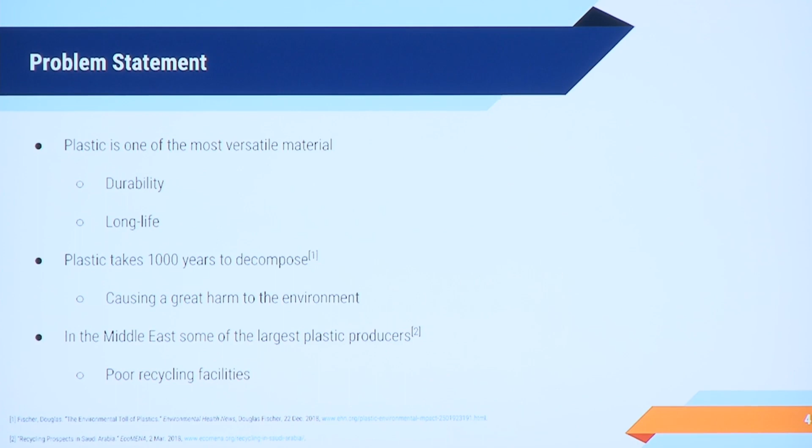Plastic has been used all over the world due to its attractive features such as its high durability and long life. But these features come at a cost, because plastic takes almost thousands of years to decompose, which causes great harm to the environment in general.

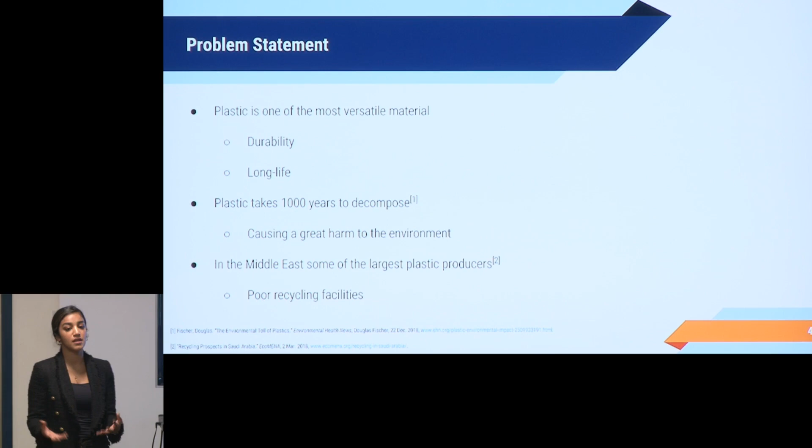In the Middle East, more specifically, are some of the largest plastic producers in the world. However, the recycling facilities and sustainable plastic there are very poor. Even though recycling facilities are poor, there's very high usage and waste generated in that region. The waste generated is estimated to be equal to 2 million cars in weight, and the usage of plastic is 20 times the world average.

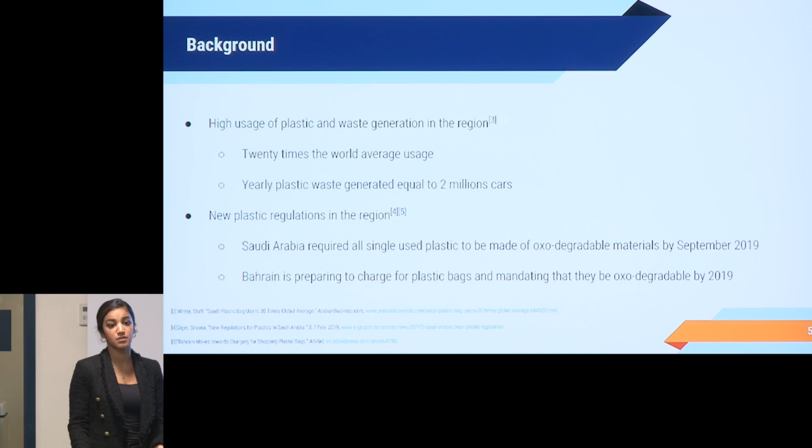To counter these problems, some new plastic regulations have been put in place in that region. Saudi Arabia has made it mandatory that all plastic be oxo-degradable by the end of September 2019. Another country in the region, Bahrain, is preparing to charge for plastic bags and make all plastics oxo-degradable by the end of 2019.

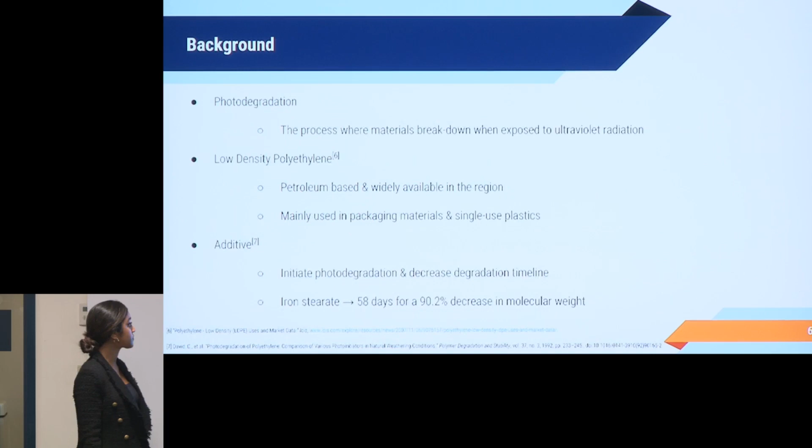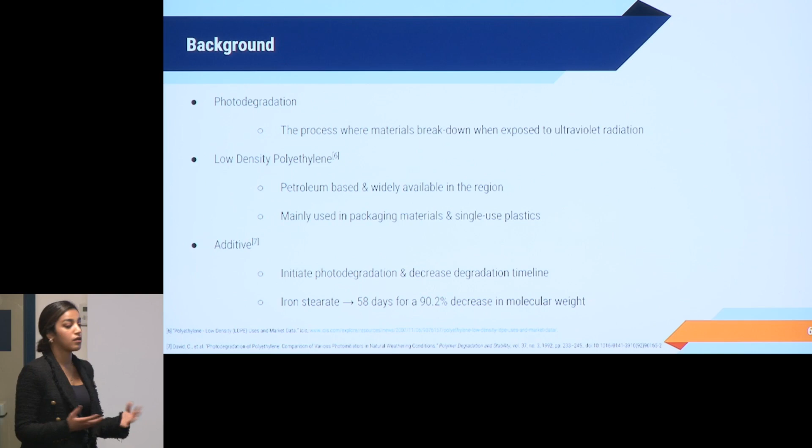So what's photodegradation? Photodegradation is the process where the material, when exposed to sun rays for a long period of time, degrades. We're focusing more on the polymer low-density polyethylene, which is widely available in the region given that it's petroleum-based, and also mainly used in single-use plastics.

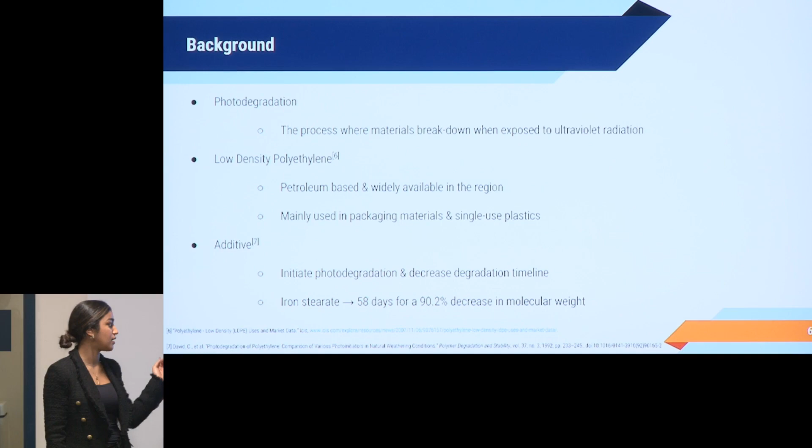The additive we'll be looking at will help initiate the photodegradation process and decrease the timeline for it to degrade. We're looking into iron stearate, and based on literature, it decreases the molecular weight of the polymer up to 90.2% in only 58 days, which could be very beneficial.

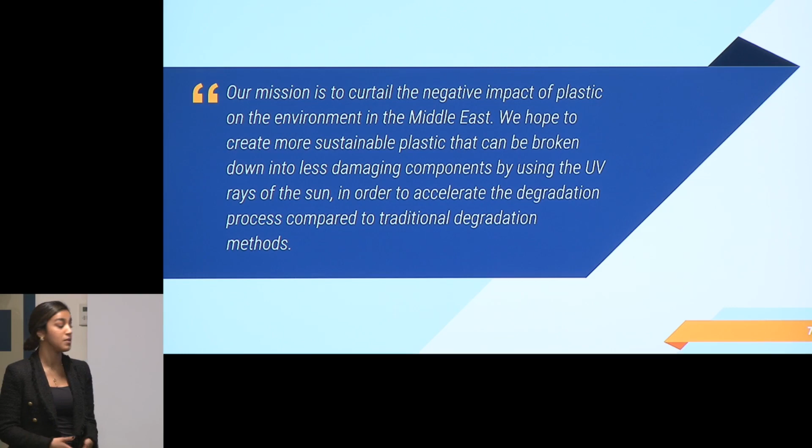Our mission basically is to decrease the negative impacts of plastic in the region and help the waste buildup problem created in the region by using the sustainable solution we propose, such as photodegradation, to help decrease the degradation time compared to traditional degradation methods used.

For our business structure, we're the Camel Consulting Group, a startup initiative established in 2019, and we're going to be located in Kuwait, hopefully. We help companies that already have plastic plants create more sustainable plastic by suggesting sustainable solutions in order for them to take their plastic production and make it more sustainable.

For our market analysis, we determined the ideal market to be the Middle East, given that we are from the Middle East and there is a huge problem with plastic waste being built up there. We're hopefully going to partner with large plastic companies that are among the top 10 plastic producers, such as SABIC and Kuwait.

SABIC is based in Saudi, and it's one of the largest polyethylene producers in the world. Kuwait has another plastic company that's based there, and it's also one of the top 10 plastic producers in the world.

Our major competitors are Avani in UAE, which creates biodegradable plastic bags, and GXT Green, based in Boston, Mass. GXT Green, however, works with plant-based materials to create photodegradable plastic bags, while we'll be working with petroleum-based polymers. We hope to do more research and development and propose more solutions to these companies.

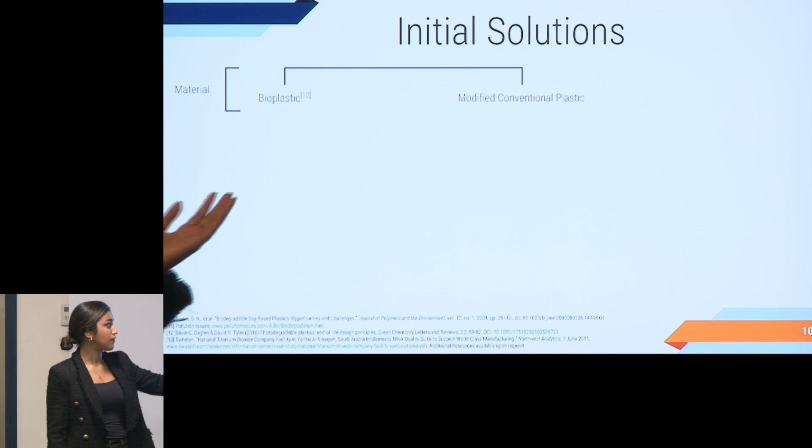For our initial solutions for the material, we looked into bioplastic and modified conventional plastic. However, we ruled out bioplastic because of the lack of resources, and it would be highly competitive to enter a market where conventional plastic has been used for a very long time.

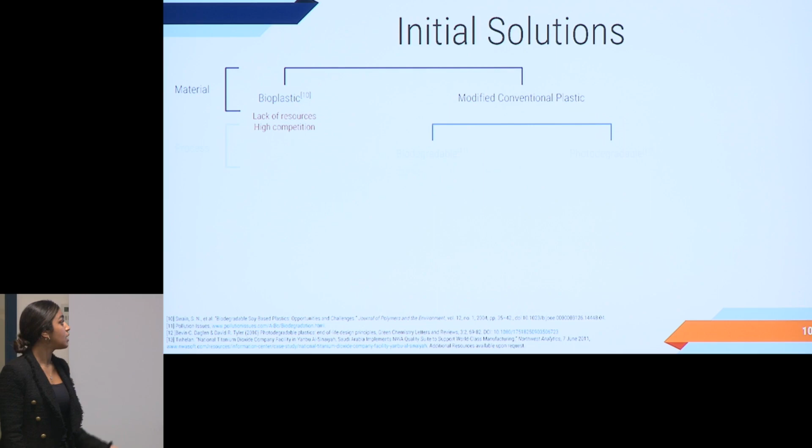For our process, we looked into biodegradation versus photodegradation. However, we ruled out biodegradation because the location, the Middle East, is not going to satisfy the conditions since it's very hot, dry, and arid.

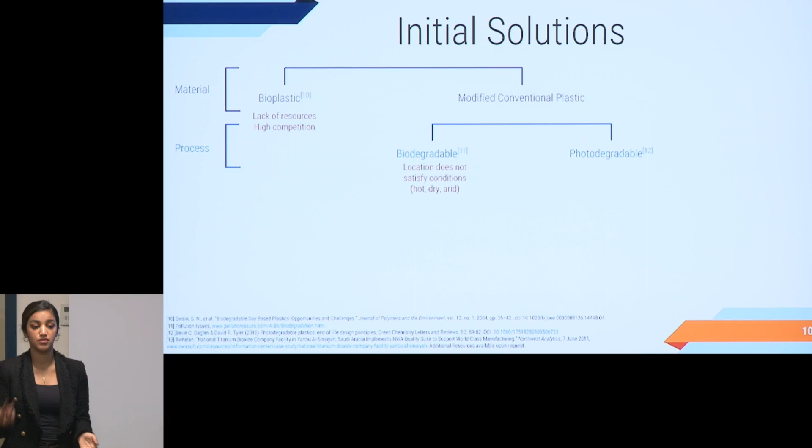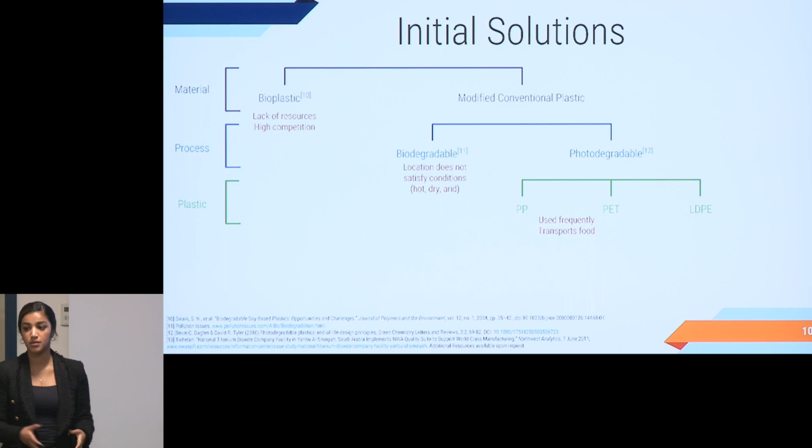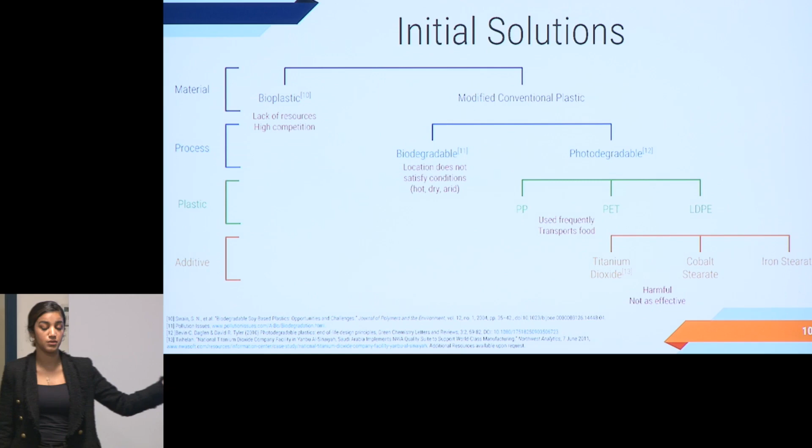When it came to polymers, we looked into PP, PET, and LDPE. However, we ruled out PP and PET because they're usually used in packaging material for food and transporting food. When it came to the additive, we looked into titanium dioxide, cobalt stearate, and iron stearate, but we chose iron stearate because titanium dioxide can be harmful to the environment, and cobalt stearate, as shown in literature, is not as effective as iron stearate when it comes to photodegradation.

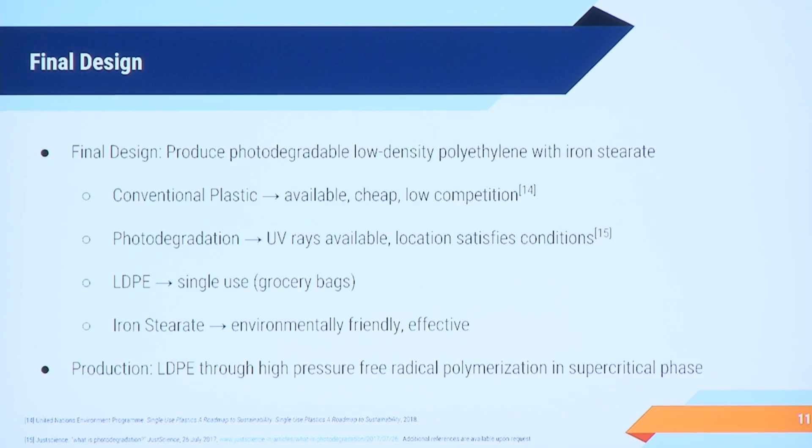So to sum up, our final design solution is to produce photodegradable LDPE with iron stearate as the additive. Conventional plastic is used because it's readily found in the area, it's cheap, and it's easy to get into the market as opposed to bioplastic.

Photodegradation was chosen because biodegradation can't occur at the rate that we expect it to because of the desert regions in the area. LDPE is the main component of grocery bags, and so single-use plastic is our main focus for the project. That's why we chose this specific polymer.

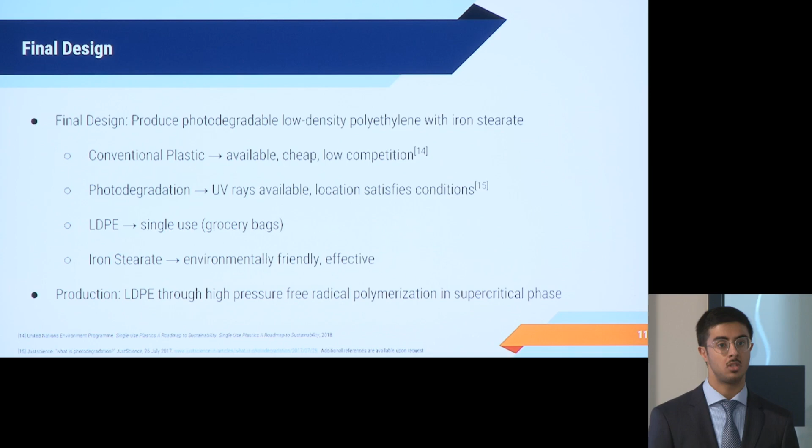And iron stearate, as Eman said, is environmentally friendly and also effective at degradation. So to implement this solution, we decided on creating large-scale production of LDPE through the free radical polymerization phase. This is the reaction in which we're going to produce the actual plastic, the LDPE.

Free radical polymerization is the process of creating polymers by radicals that are from an initiating molecule. In our case, we're going to be using benzoyl peroxide as the initiator. In the initiation phase, the benzoyl peroxide breaks down into radicals and starts attacking the monomer molecules.

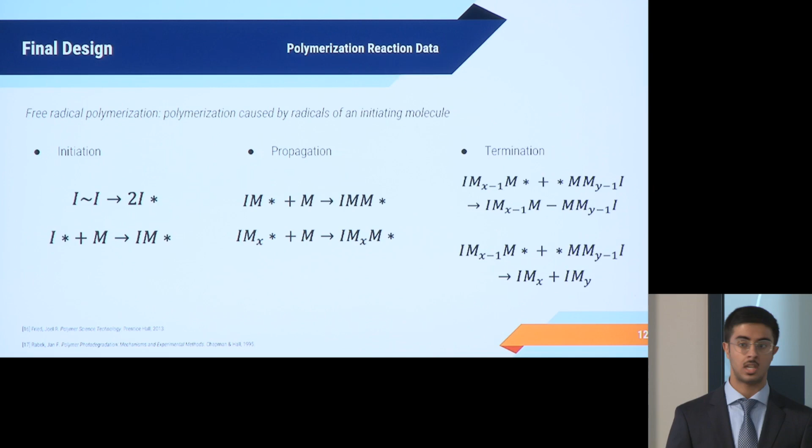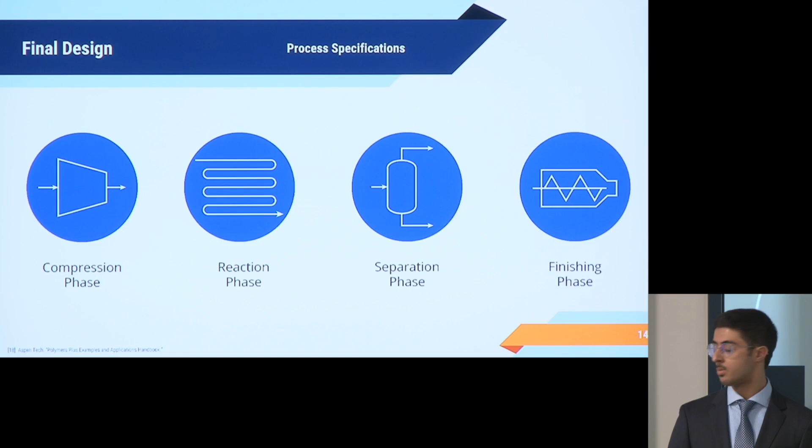However, to create the actual large-scale LDPE production, there are several phases in the overall system: a compression phase, reaction phase, separation, and finishing phases as well. This is our overall process flow diagram.

In the inlet, we have the ethylene that is sent to a series of compressors in the compression phase. It is compressed from a vapor to a liquid, a supercritical fluid, for the reaction. And before the reaction phase, the benzoyl peroxide is mixed in to start the reaction in the tubular reactor.

After the products leave the reactor, they're separated in a high pressure and low pressure separator. Ethylene is recycled back according to the pressure. For example, the ethylene coming out of the high pressure separator is already at high pressure, so it's sent to the high pressure compressor.

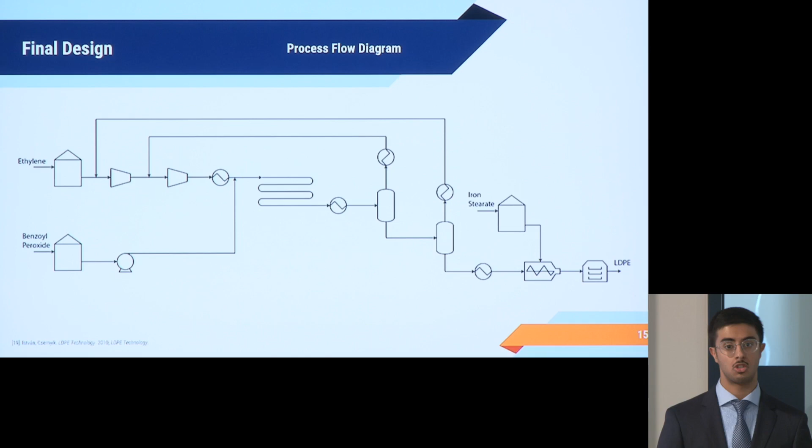The LDPE is at the bottoms and then sent to the finishing phase, in which it is extruded with the iron stearate and then dried into pellets.

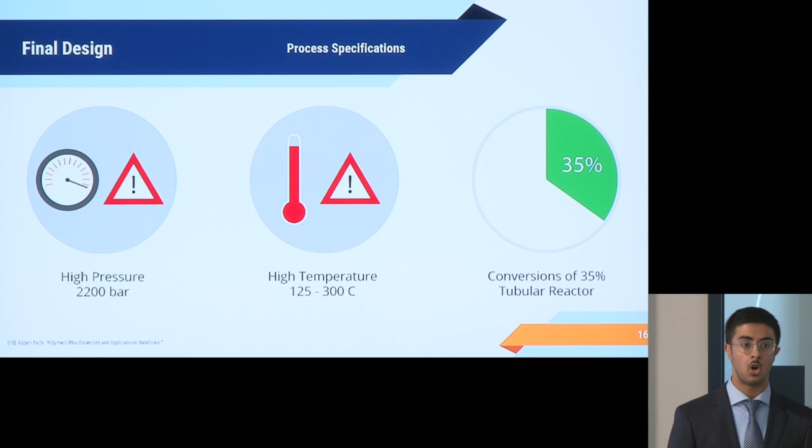This process occurs at high pressure at 2200 bar, high temperature with temperatures up to 300 Celsius, and can provide a conversion rate of 35%. This is preferred over autoclave reactors, which only provide 22%.

So after the LDPE has been produced with the iron stearate, we were able to investigate the mechanisms of photodegradation. Photodegradation, as Eman mentioned earlier, is a process in which plastic breaks down when exposed to UV rays. Very similar to the first reaction that we mentioned, there's an initiation, propagation, and termination steps.

In the initiation, oxygen and other impurities, such as our additive, absorb UV rays and turn into radicals. In the propagation phase, these radicals attack the polymer at different sites, and that's where the polymer breaks down. In the termination phase, the radicals combine, which results in several smaller fragments than the first polymer that we discussed.

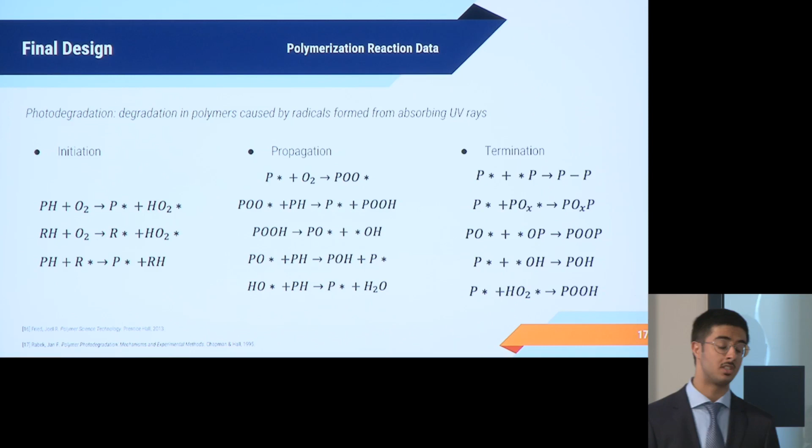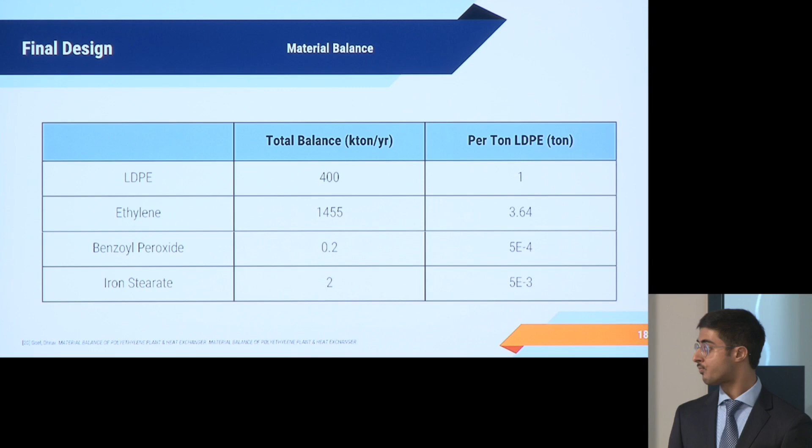We were also able to perform a mass balance on the overall process according to literature and industry standards. We decided specifically to look at 400 kilotons of LDPE produced per year, which is the standard in the region. Specifically, SABIC produces this much LDPE per year.

Here is the overall piping and instrumentation diagram for the process. It shows the four phases that Abdulrahman mentioned earlier. The process begins with producing LDPE through the conventional method, then adding the additive iron stearate to the polymer to create photodegradable plastics.

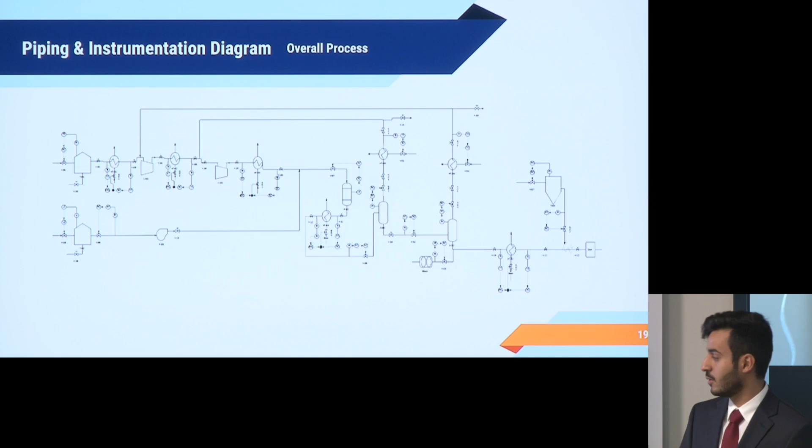Moving on to the first phase of the process, which is the compression phase, which consists of the following major units. The tank is used to store and feed the system with the raw materials, and the heat exchanger is used to maintain the temperature of the system within a certain limitation.

The compressor is used to compress the ethylene coming from the suppliers in a vapor phase to a liquid phase. The control systems used in this phase are the level on the initiator tank to avoid overflowing in the tank, and temperature on the heat exchanger to avoid overheating the system, and finally pressure on the ethylene

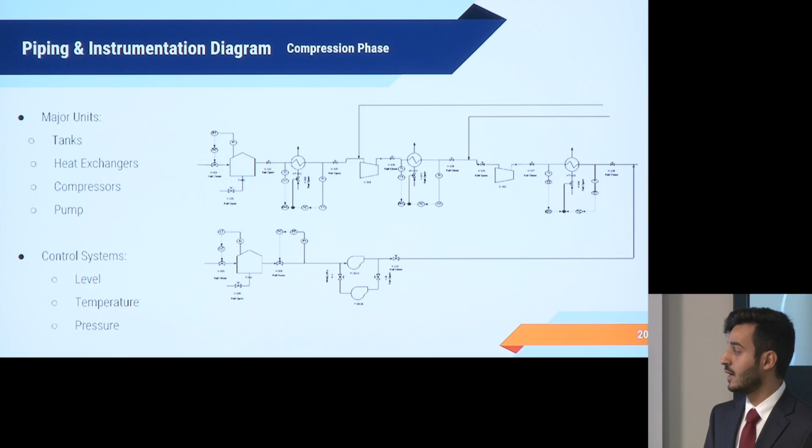tank to avoid building up pressure in the system.

The second phase of the process is the reaction phase, which consists of the following major units. The reactor is used to polymerize the ethylene to polyethylene with the help of benzoyl peroxide that is being injected to the reactor in multiple stages.

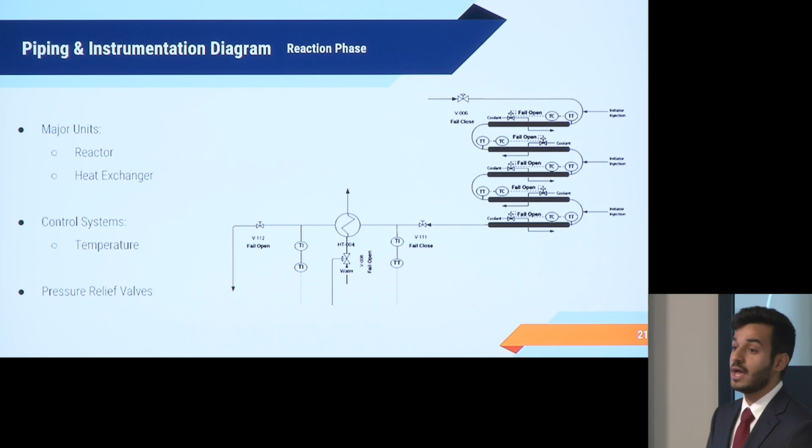The control system for this phase are the temperature on the heat exchanger and on the cooling jacket of the reactor in order to mitigate excessive heat and runaway reaction in the reactor. In addition to that, we do have multiple pressure relief valves that have been placed on the reactor in order to avoid building up pressure in the reactor, which may cause explosions.

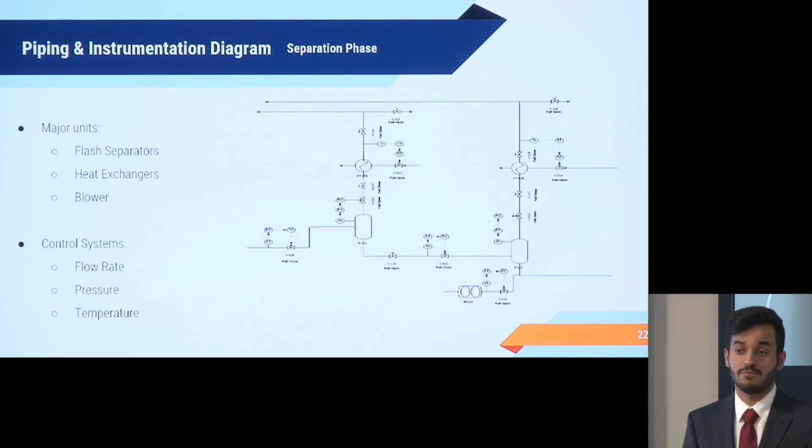The third phase of the process is the separation phase, which consists of the following major units. The flash separator is used to separate the ethylene from the polyethylene and send it back to the compression phase. And the blower is used to provide the system with sufficient air to push the polymers to the finishing phase.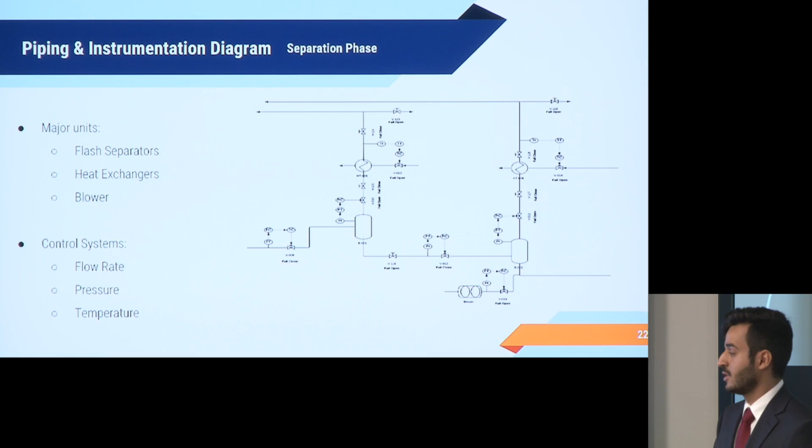The control systems used in this phase are a flow rate control on the inlet stream of the phase in order to regulate the inlet flow. Also, we have a pressure control system in the flash separators to maintain proper pressure inside the separators. And finally, we have a temperature control system in the two heat exchangers.

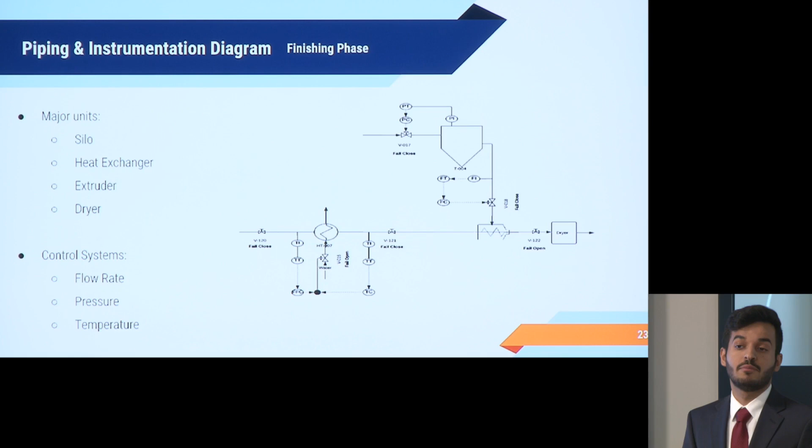The final phase of the process is the finishing phase, which consists of the following major units. The extruder is used to mix the polymers coming out of the separation phase with the additives coming from the silo. Then they end up in the dryer to dry out the pellets and be ready for shipping and packaging.

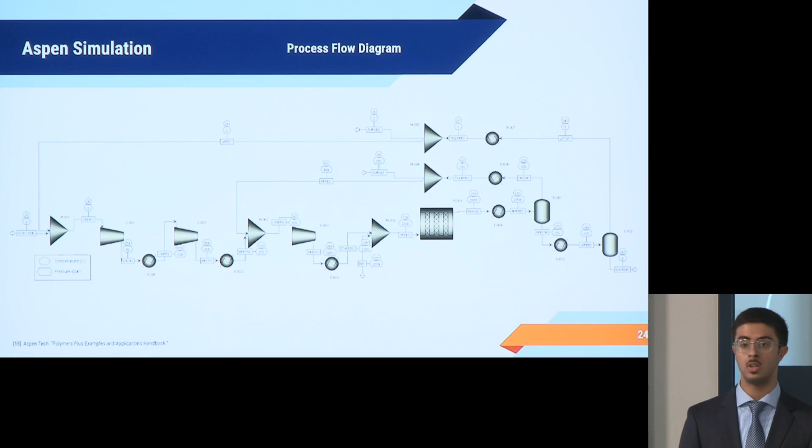Using this information, we were able to construct an Aspen simulation for the project. However, it should be noted that Aspen does not have extruder or dryer blocks, and so the simulation only accounts for the first three phases: compression, reaction, and separation.

So some stream results that we obtained from the simulation. The main purpose of the compressor is to compress the ethylene to liquid phase, and so the main change was increasing the pressure from 3 bar to 2200 bar. The temperature also increases as a result, and that's desired going into the reactor.

For the reaction phase, the pressure remains constant. However, due to the exothermic reaction, the temperature increases to 270 Celsius.

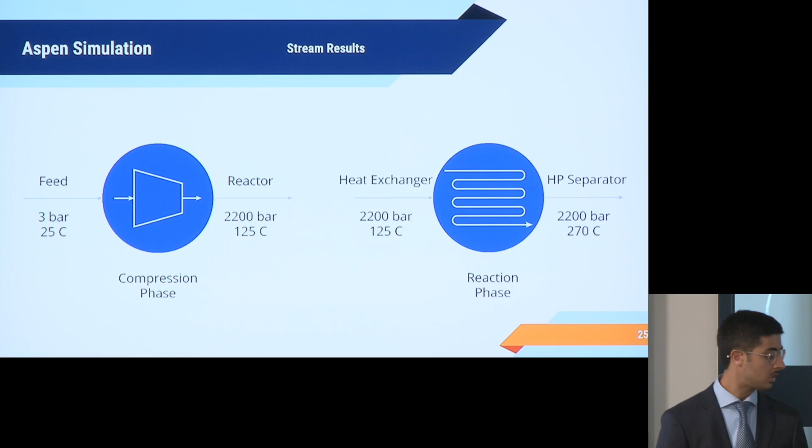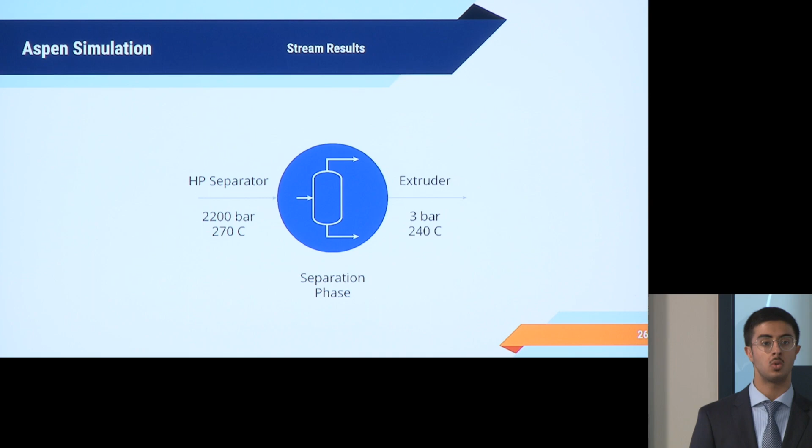In the separating phase, we have the high pressure and low pressure separator. So the pressure decreases from 2200 bar back to 3 bar. The temperature also slightly cools, but we still need that temperature for the extruder.

For each separation, we also have recycle streams, as mentioned earlier. So for the high pressure separator recycle stream, the ethylene is sent back at 350 bar, but needs to be cooled down before it's sent to the compressor. And so the temperature is cooled from 270 Celsius to 60.

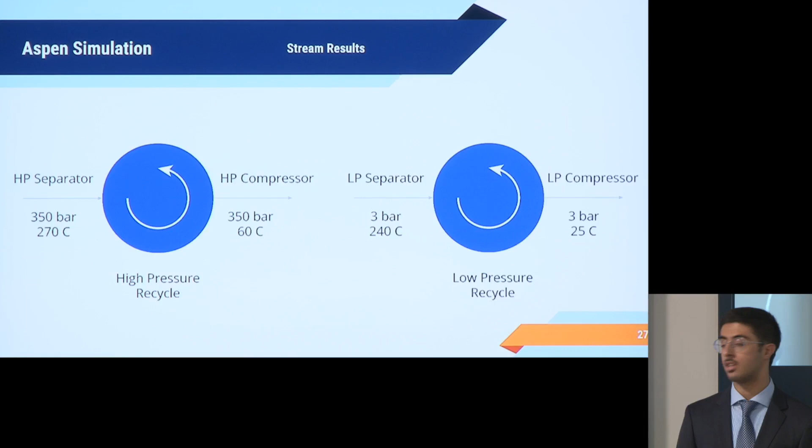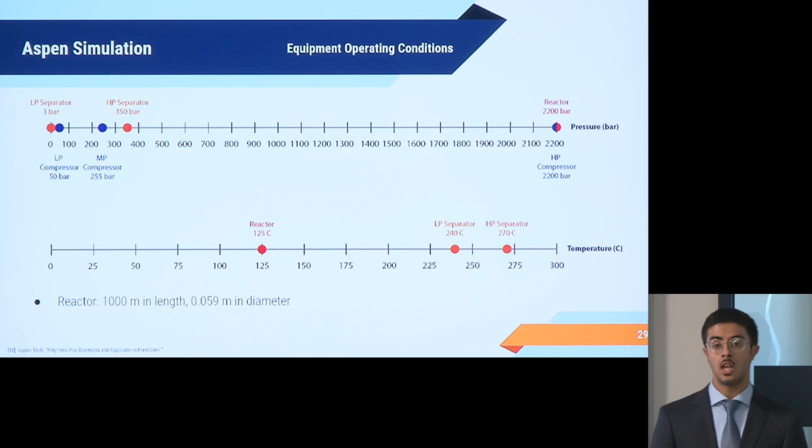We were also able to size the equipment according to Aspen and obtain the operating conditions. The separators occur from roughly 3 bar to 350 bar. The compressors range from 50 to 2200 bar, and the reactor also operates at 2200 bar. For the temperature, the inlet for the reactor is at 125 Celsius, and the separators range from 240 to 270.

The reactor was also sized to be 1,000 meters in length and roughly 6 centimeters in diameter.

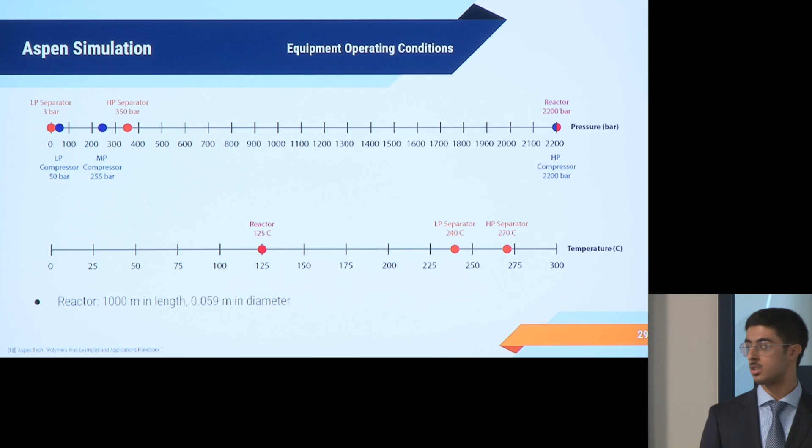So with Aspen, we were able to obtain significant useful information. Stream results was definitely one of the things we needed. We were also able to verify the production of LDPE according to the reactions specified. And using this information, we started our initial safety and economic analyses.

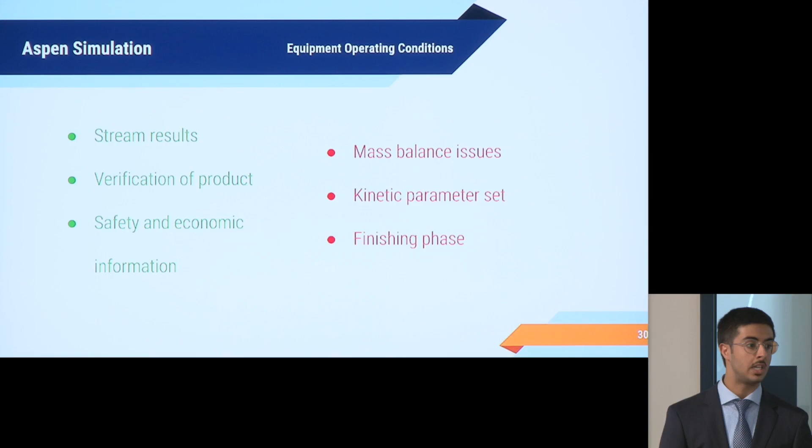However, Aspen's not perfect, as I'm sure we all know. The mass balance of the simulation provided a 1-to-1 mass ratio of the initiator to the final product, which does not align with the chemistry. That could be a result of the kinetic parameters used. However, any deviation from the set that we used resulted in errors. And as mentioned earlier, we were not able to model the finishing phase.

When it comes to safety, as you know, it's one of the biggest factors in designing any chemical plant. So as a firm, we're going to make sure that our process adheres to the United Nations regulations for safety in chemical plants, which is part of the International Labour Organization, as well as following the globally harmonized system of classification and labeling of chemicals.

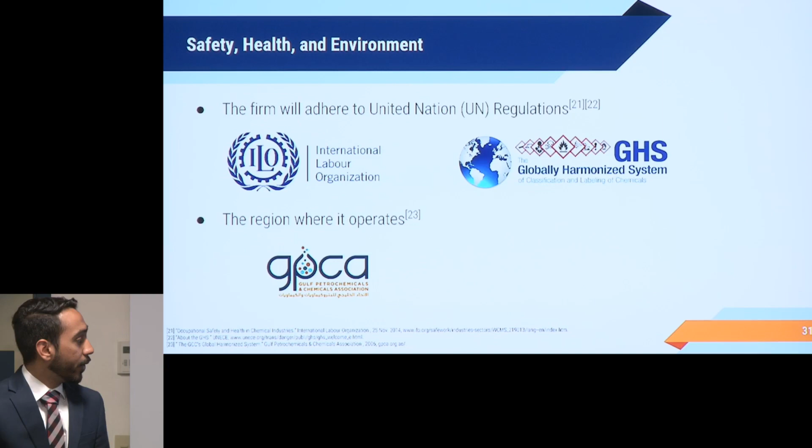In addition to that, the firm will make sure that its process follows the regulation at the region it operates at. In our case, the Gulf Petrochemical and Chemicals Association.

Here is the safety data sheet for the material found in the system. As we know, the GHS system gives a signal word for each material, which shows how hazardous that material is. It's either danger or warning. Danger for immediate hazard, and warning for less hazardous. It also gives a pictogram for user-friendly explanation and demonstration.

So for ethylene and benzoyl peroxide, they're both considered dangerous materials, so they need specific ways of handling and storing. However, iron stearate is less harmful than the other two, and LDPE is not even considered a hazardous material in the GHS system.

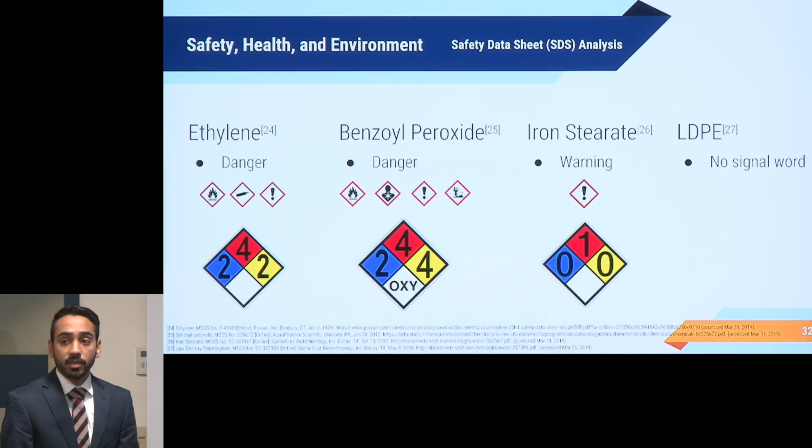Also, the biggest concern in any chemical plant is explosions and flammability. As you know, we run the reaction as a very highly exothermic reaction. It operates at high pressure and temperature.

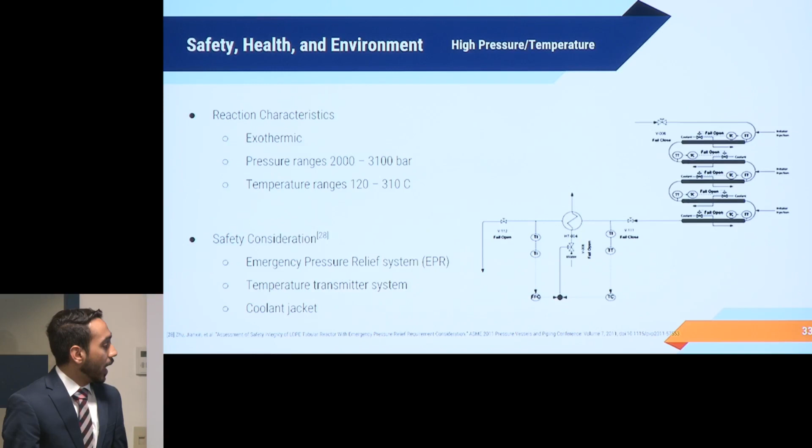So we took the safety consideration of the reactor following a Chinese petrochemical model company. They used emergency pressure relief systems. They put 5 pressure relief valves along the reactor, as well as temperature transmitter sensors to sense any excessive temperature and send signal to the coolant jacket to mitigate that excessive temperature.

We also took into consideration the inherently safer design, which consists of 4 major categories. Minimize, for example in our case, we are minimizing the hazardous material, which are ethylene and benzoyl peroxide.

The second category is substitute, which means having safer equipment. So we are thinking of switching to safer mechanical pumps and pressure gauges, as well as using environmentally friendly additives like iron stearate. The third category is moderate, which means operating at safer conditions.

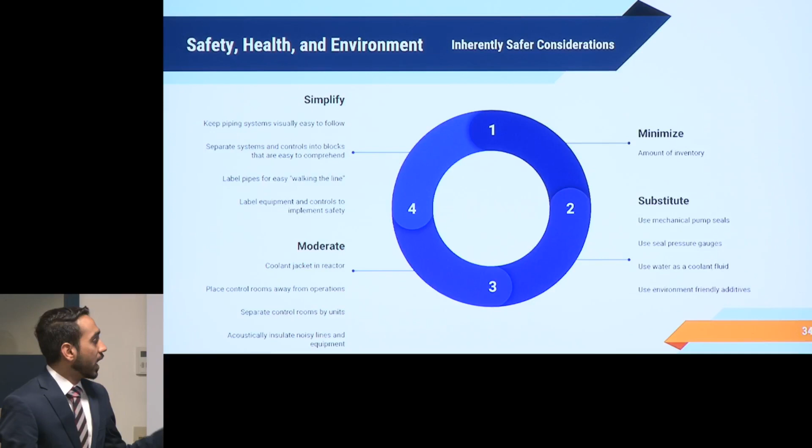So we thought of placing the control rooms away from the operation, also separate control rooms by units, so each equipment has its own control room, and finally simplify and make the process easier for operators to see and visually follow.

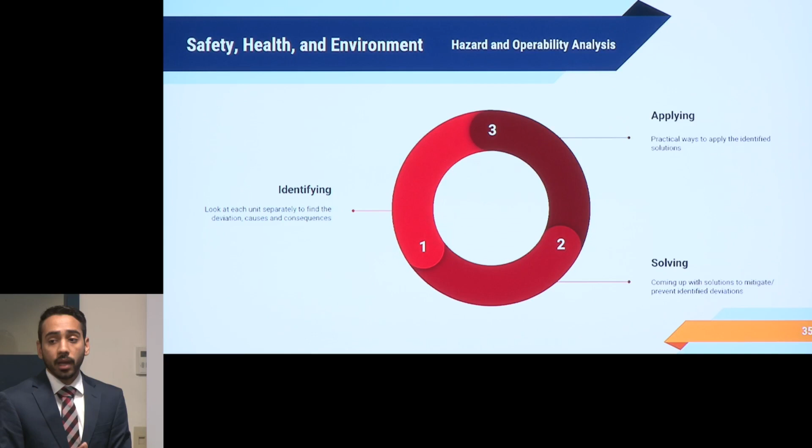Also, we took HAZOP into consideration. We identified the problems that can occur in each equipment separately, then found solutions for that problem and ways to apply these solutions. In case of tanks, the main or major issue is overflowing, and that can be due to many causes like high inlet stream or valve malfunction.

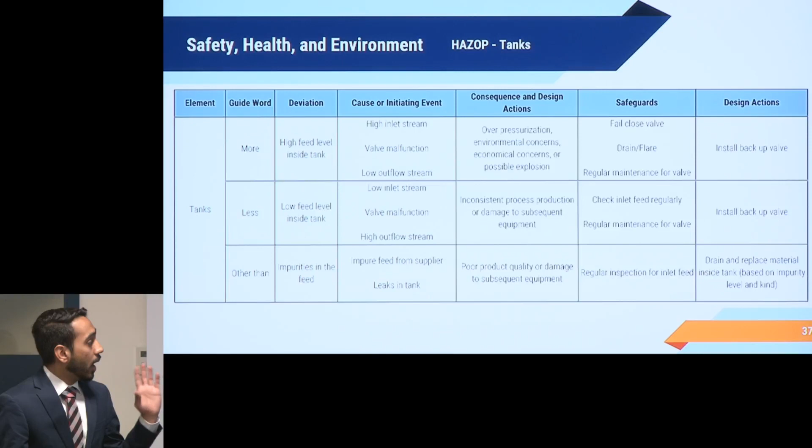So in this case, we have the fail-closed valve before the tank. Also, we have drain and flare. This is the main concern with the tank.

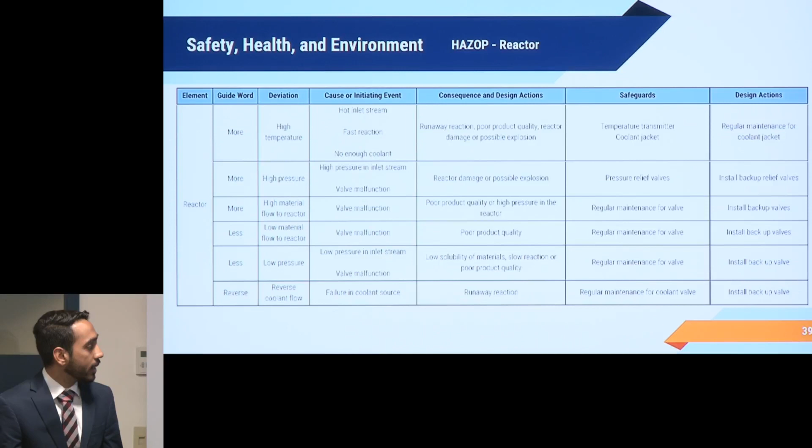The second concern is with the reactor, and as we mentioned earlier, the main concern is the high pressure and temperature, and that can be mitigated by having relief valves along the reactor, as well as temperature transmitter and alarm system.

The third component is the compressor, and the main issue with the compressor is the high pressure, which can cause a burst in the pipe or the compressor itself, and this can be mitigated by having regular maintenance to the system.

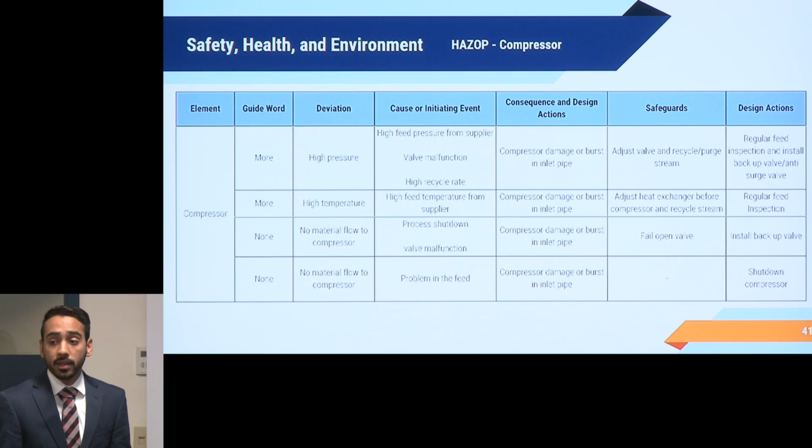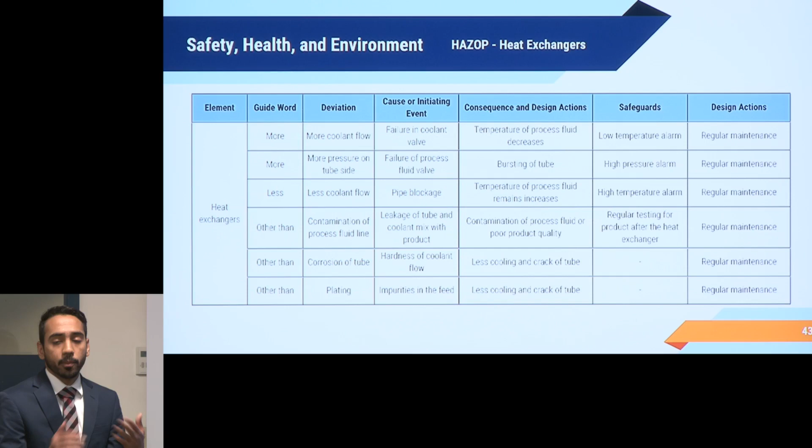Heat exchangers can have multiple problems that can occur, and the best way to deal with this is to have regular maintenance. Also, we have backup valves to mitigate any problem that can occur in any specific heat exchanger.

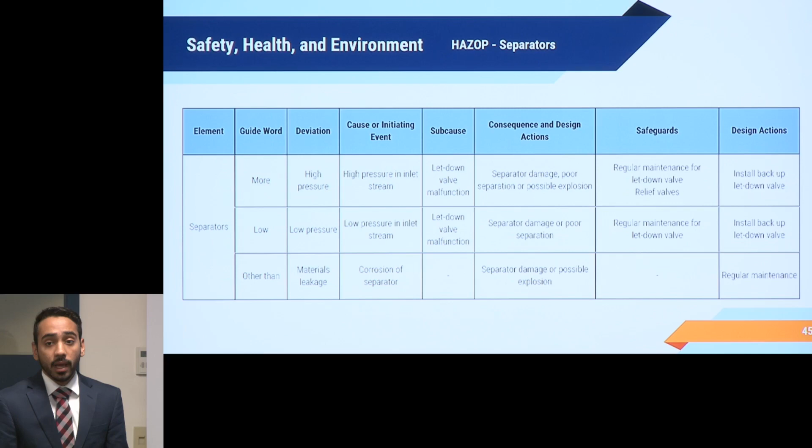Separators can also have multiple problems like high pressure or high temperature, and that can be maintained by having regular maintenance for the let-down valve, which decreases the pressure of the inlet stream coming out of the separator or into the separator.

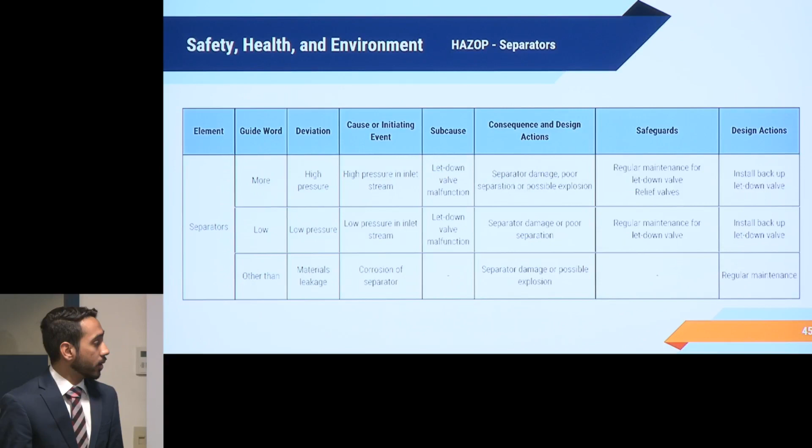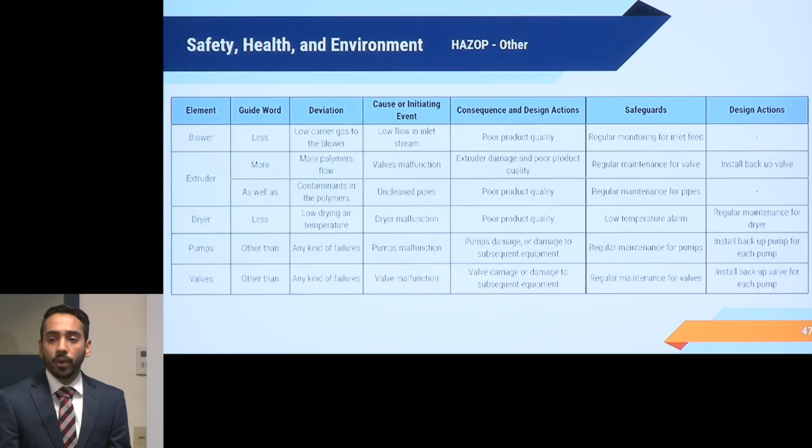Also, we have a couple other equipment in the system. We took that into consideration, and the best way to mitigate any problem is to prevent it at the first place. So we are thinking of having regular maintenance for all equipment all the time.

For the economic analysis, as a consulting firm, the economic evaluation can vary from company to company based on the client requirements. For example, companies like SABIC already have an existing LDPE stream, so they only need the finishing phase of the process. While companies like Equate don't have the process for producing LDPE, so they need the whole technology from start to end. Therefore, the economic analysis has been conducted for the whole process based on the annual production rate of 400 kiloton of LDPE.

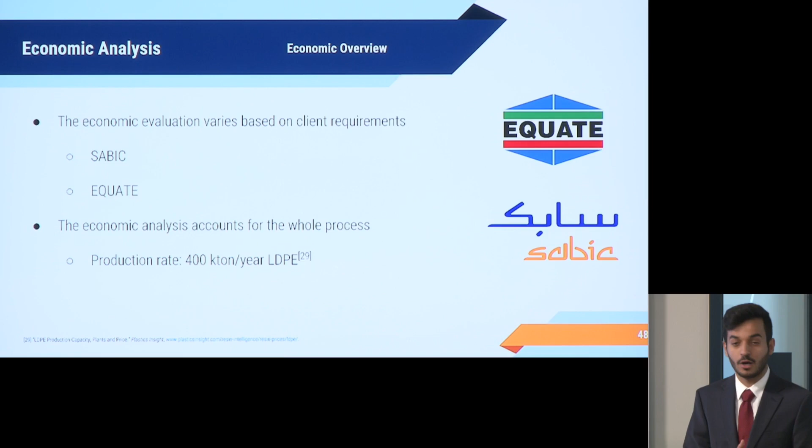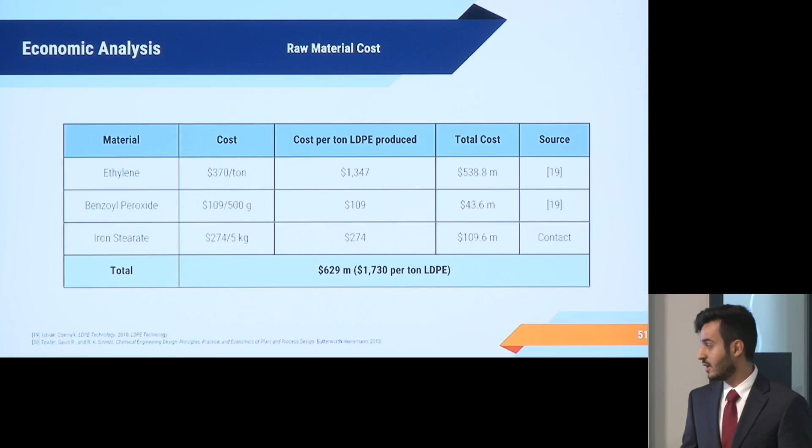The second component is the raw material cost. The cost of each raw material is shown in the table, and the total raw material cost accumulates to $629 million, which is equivalent to 1,700 dollars of LDPE per ton of LDPE produced.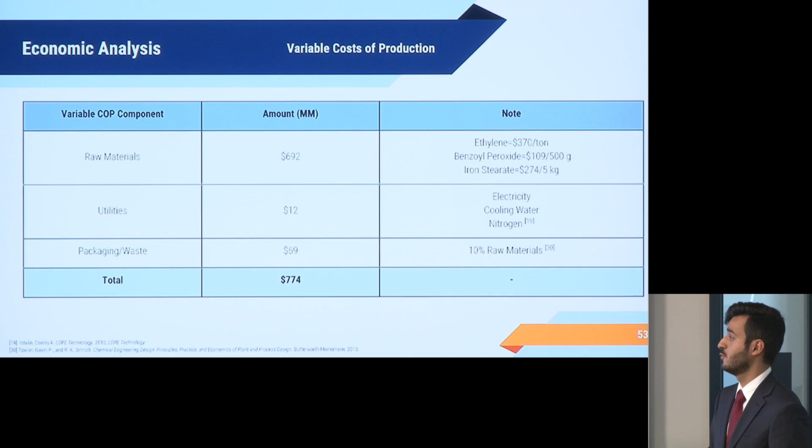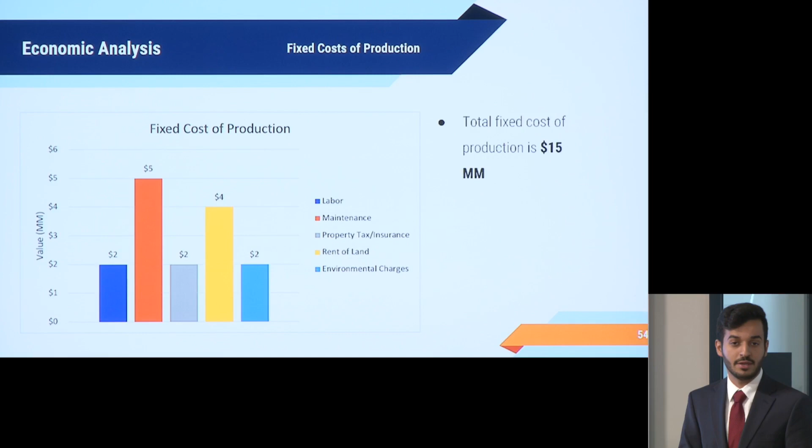And here is another factor, the fixed cost of production. The total fixed cost of production turned out to be $15 million per year. And here are the specifications for it.

So we're expecting to sell our photodegradable product at the lowest price we can sell at, which is $2,150 per ton of LDPE. However, this price can vary based on our requirement needs.

So our client needs. For example, SABIC can sell it at a different price, Equate can sell it at a different price. However, we can sell it at $2,150. We are still way below the average minimum global price of conventional LDPE, which is $3,500. This turns out to have a net cash flow of $74 million.

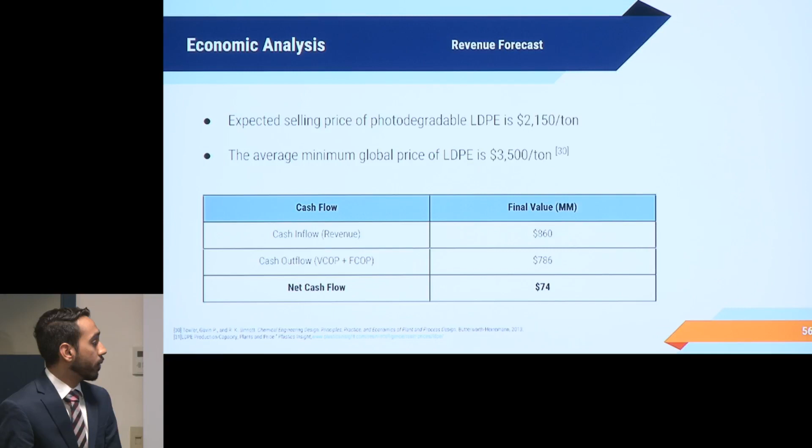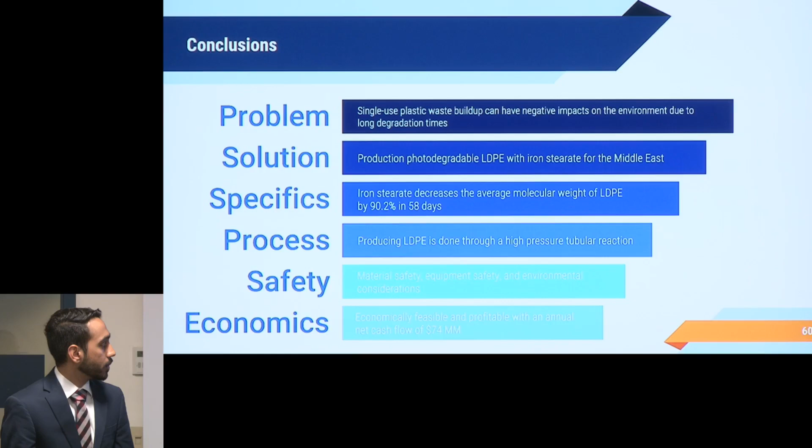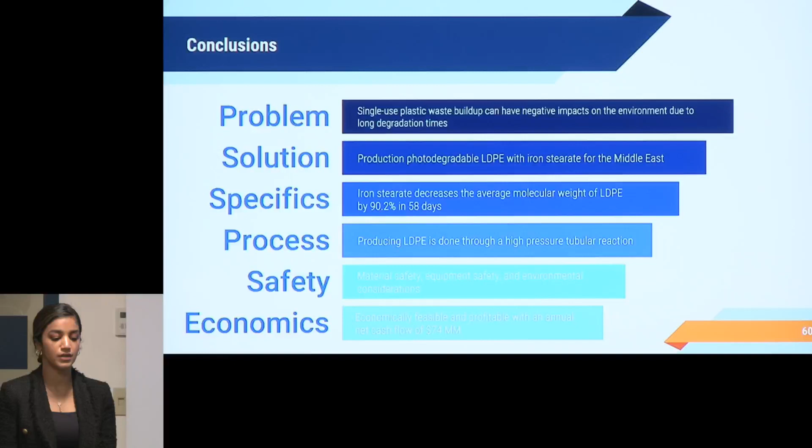In conclusion, single-use plastic waste buildup has been causing great harm to the environment. The production of photodegradable LDPE could help decrease this buildup, and that could be done by adding iron stearate, as iron stearate has been shown to decrease the average molecular weight of the polymer by 90.2% in only 58 days, according to literature.

The production of LDPE would be done through a high-pressure tubular reaction. And for safety, we took into consideration material and equipment safety and the environmental considerations put in place.

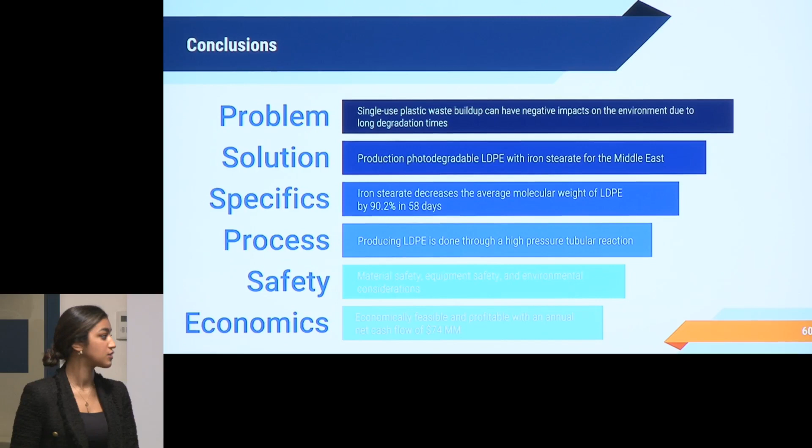The project seems to be economically feasible and profitable with an annual net cash flow of $74 million per year. For our future recommendations for the process, we hope to develop a more consistent control system and to do more chemical research on the process.

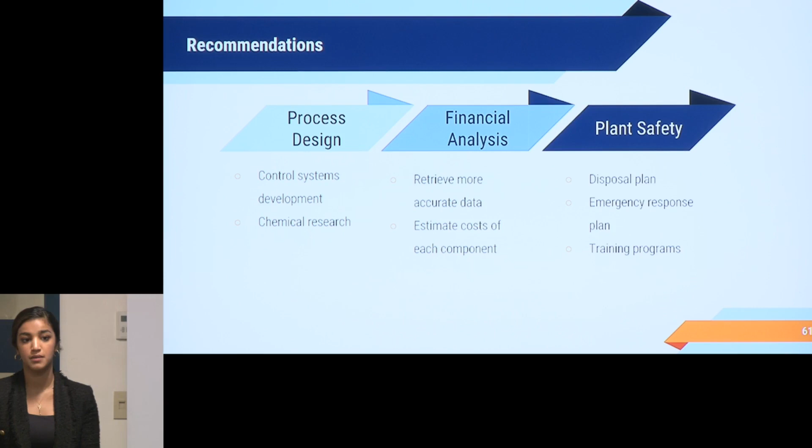For the financial aspect, we hope to retrieve more accurate data so we can use it while analyzing the finances and to estimate the cost of each component. For our plant safety, we hope to have a disposal plan for the plastic waste buildup, an emergency response plan, and better training programs for the employees in the plant so we avoid any hazards that could occur. Thank you.